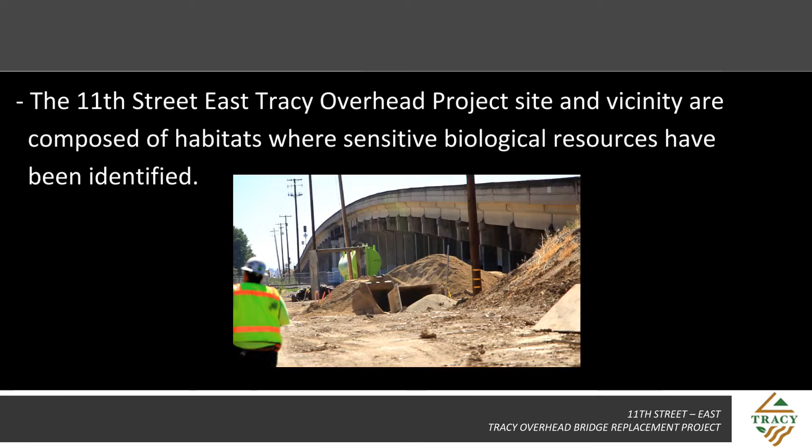Survey of environment: the 11th Street East Tracy Overhead Project site and vicinity are composed of habitats where sensitive biological resources have been identified. Located in the Central Valley, Tracy has a Mediterranean climate, sitting between infertile and fertile lands. There has been increased development pressure as the San Francisco Bay Area's population growth increases vigorously. Tracy currently stands as only the second city to uphold state standards of environmental maintenance.

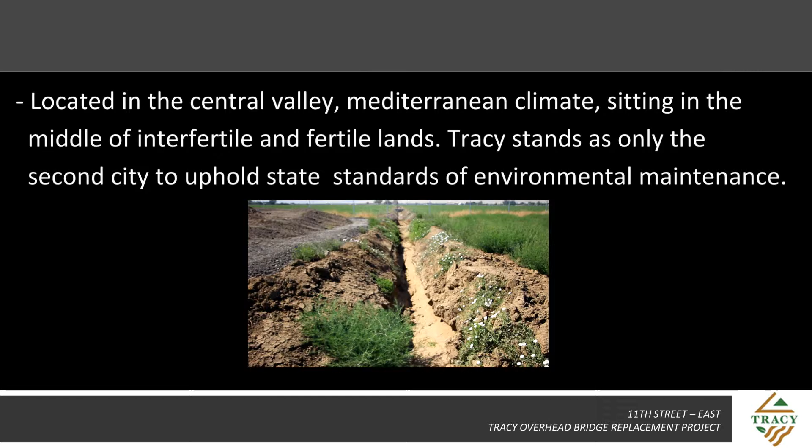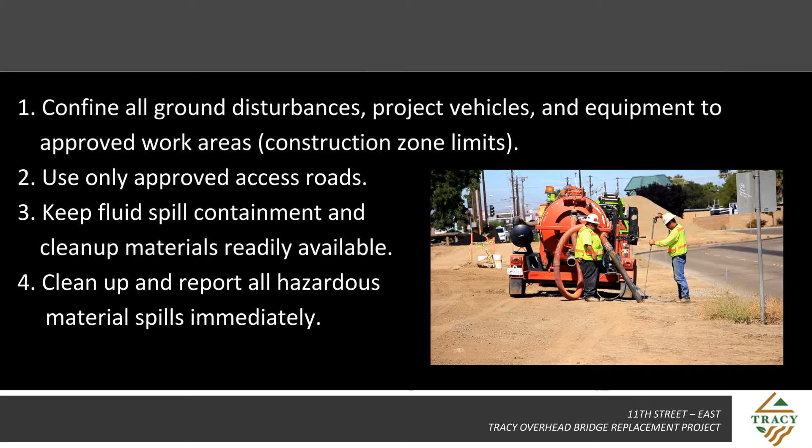GWPs must all be followed while working on the East Tracy 11th Street Bridge Replacement Project. 1. Confine all ground disturbances, project vehicles, and equipment to approved work areas. 2. Use only approved access roads.

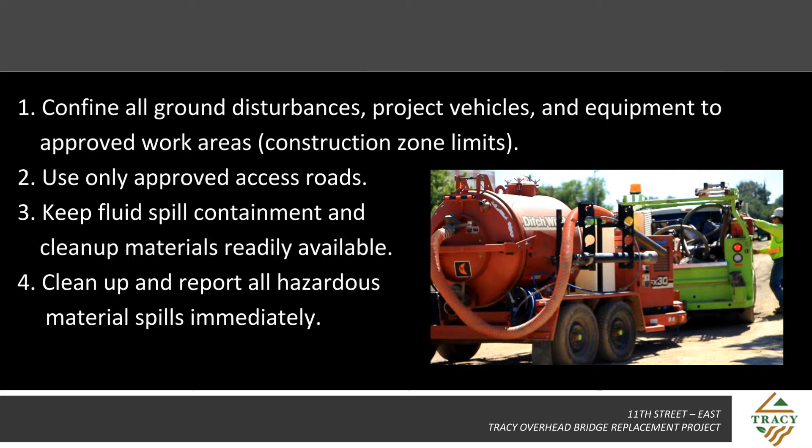3. Keep fluid spill containment and cleanup materials readily available. 4. Clean up and report all hazardous materials spills immediately. 5. Do not litter. 6. Do not bring pets, firearms, hunting, or fires onto the project site; they are prohibited. 7. Do not discharge water into unapproved areas.

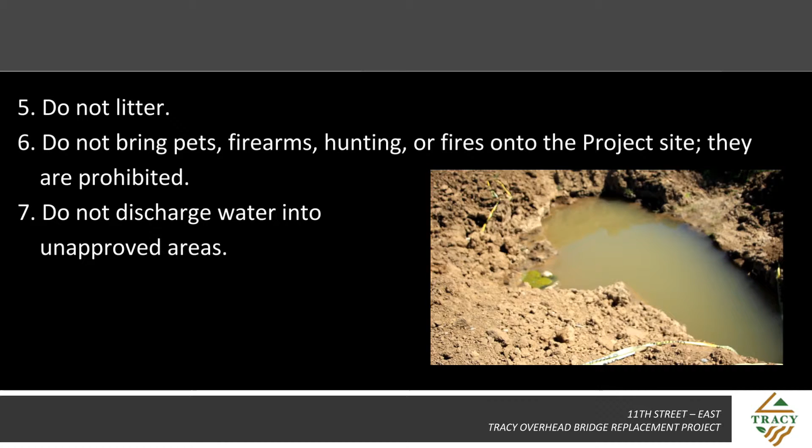8. Do not feed or harass wildlife. 9. Observe speed limits on dirt access roads of 25 miles per hour or less. 10. Implement and maintain erosion control best management practices.

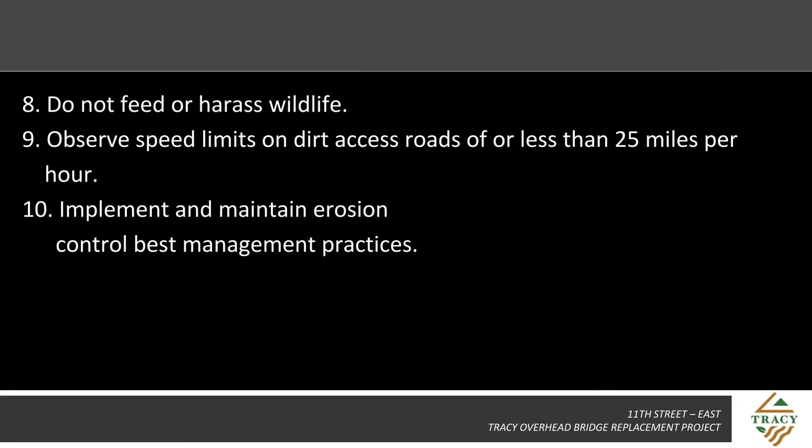It is also very important to check equipment for wildlife who may shelter in the warm equipment overnight. At the end of the day, pick up any trash that may attract wildlife.

Fire prevention should be obeyed, especially during the heat of summer or near grasslands. Smoking should be limited to designated smoking areas. Cigarette butts and cigars should be disposed of appropriately and not left on the ground or buried.

Provide fire extinguishers near all welding, soldering, or other sources of ignition, and keep fire extinguishers easy to see and reach in case of an emergency. Be sure to also follow any fire prevention laws regulated by the Union Pacific Railroad Company.

Environmental impacts and mitigation measures. In order to minimize construction impacts, the following should be observed.

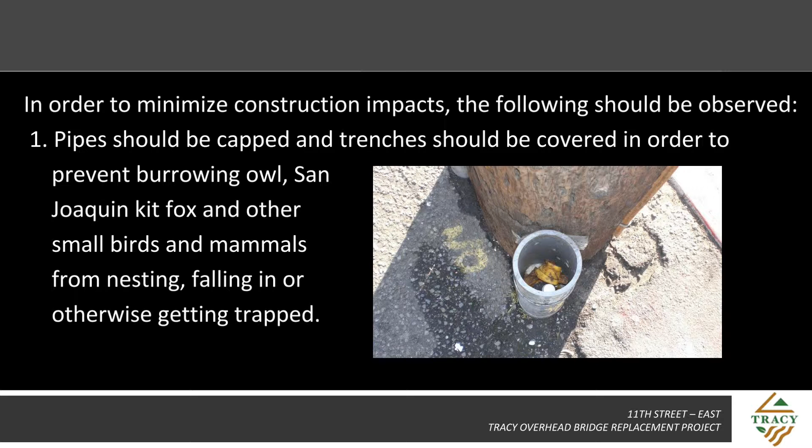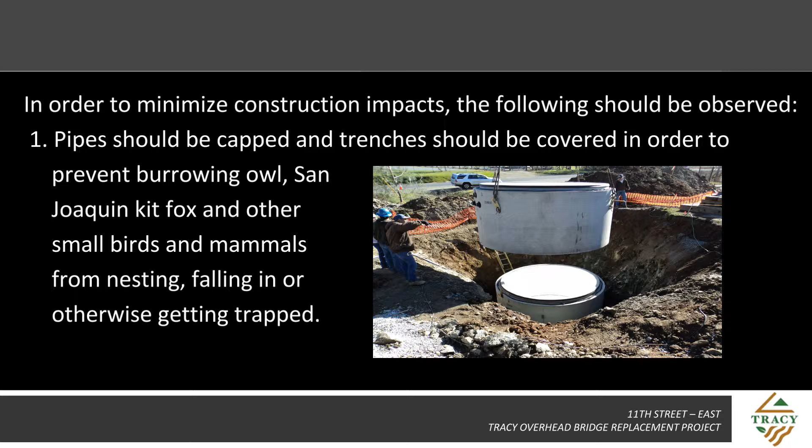1. Pipes should be capped and trenches should be covered in order to prevent burrowing owls, San Joaquin kit foxes, and other small birds and mammals from nesting, falling in, or otherwise getting trapped. 2. During active construction, open trenches need escape ramps so burrowing owls, kit foxes, and mammals won't get trapped.

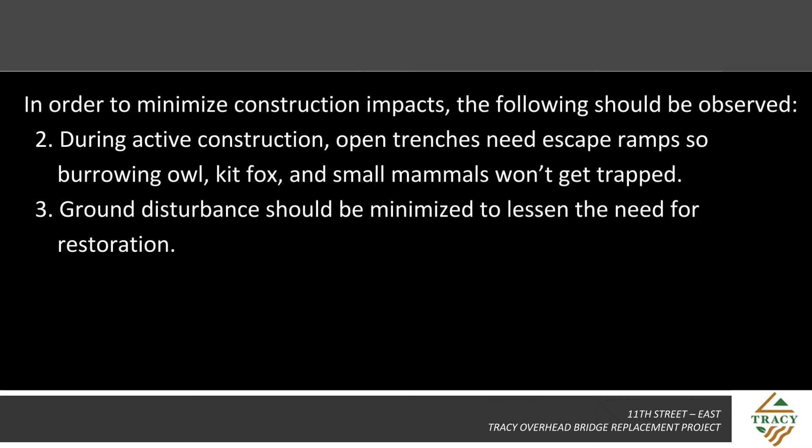3. Ground disturbances should be minimized to lessen the need for restoration. 4. Avoid possible disturbance of nesting birds by staying at least 50 feet away. Let the biological monitor clear the area before you begin work.

5. Stormwater runoff must not contain hazardous waste or debris that could affect the biological resources. Please report any wildlife found in the work area.

The following are sighted wildlife of the work environment.

The Swainson's hawk. Swainson's hawk nests are generally found in scattered trees or along riparian systems adjacent to agricultural fields or pastures, but the species is also known to nest in tall shrubs and trees in proximity to development near foraging habitat. There are two color variations: light morph and dark morph.

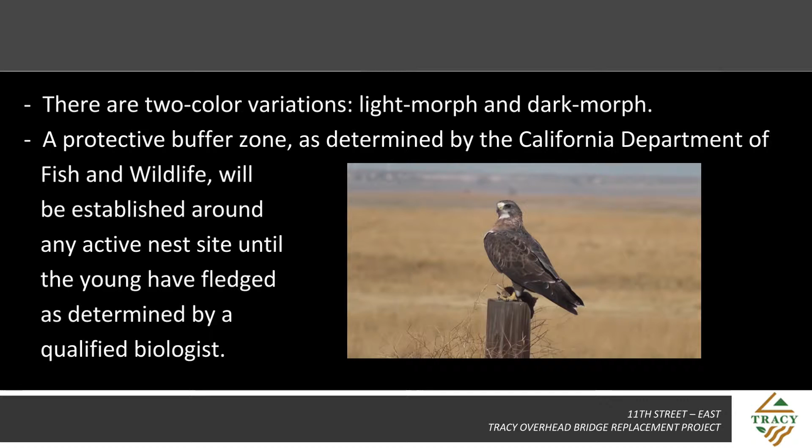A protective buffer zone, as determined by the California Department of Fish and Wildlife, will be established around any active nest site until the young have fledged, as determined by the qualified biologist. No construction will be allowed in the buffer zone. On the site, you may see the hawk foraging over the agricultural fields around the site.

The western burrowing owl. The owl is not a shy bird and may be found nesting on the railroad tracks by the agricultural fields. Burrowing owls nest in ground burrows, often occupying old ground squirrel burrows and badger dens. They are known to use artificial burrows such as abandoned pipes and culverts.

They are commonly perched on fence posts or on top of mounds outside their burrow. The owls forage in adjacent grasslands and agricultural fields.

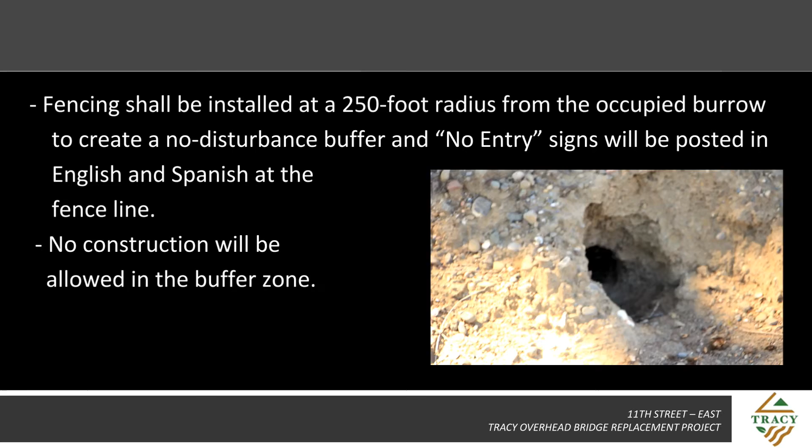If an active burrowing owl burrow is within 500 feet of the project disturbance area, then a no-disturbance buffer will be established. Fencing shall be installed at a 250-foot radius from the occupied burrow to create a no-disturbance buffer, and no-entry signs will be posted in English and Spanish at the fence line. No construction will be allowed in the buffer zone.

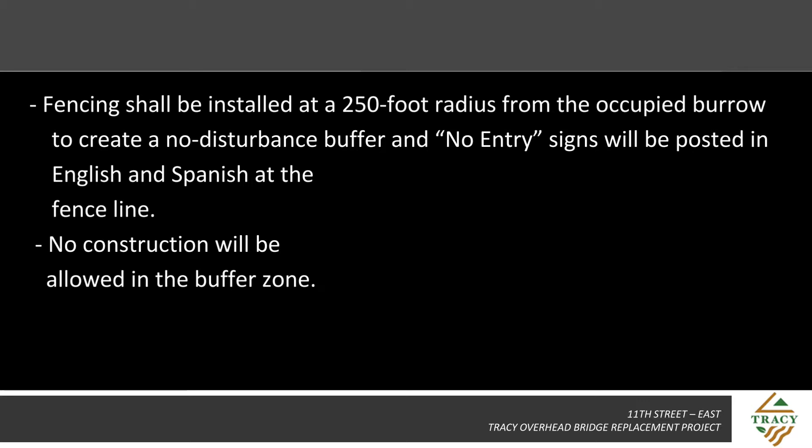The American badger is generally nocturnal. However, in remote areas with no human encroachment, they are routinely observed foraging during the day.

They prefer grasslands and open areas, which can include parklands, farms, treeless areas with friable soil, and a supply of rodent prey. Dens are typically larger than ground squirrel and other animal burrows, ranging from about 4 to 10 feet in depth and 4 to 6 feet in width.

After verification that a potential den is unoccupied, it will be excavated and backfilled by hand to ensure no badgers are trapped.

The San Joaquin kit fox may be attracted to trash on site. There are heavy fines if one is injured on the work site.

Generally nocturnal, however, in remote areas with no human encroachment, they will venture out during the day. They are the size of a house cat, with big ears, a long bushy tail, and furry toes, difficult to spot with their buff, tan, or yellowish-gray fur.

Common habitats are sagebrush and saltbush. They can be found in urban and agricultural areas as well. Dens are typically in large ground squirrel or other animal burrows.

After verification that a potential den is unoccupied, it will be excavated and backfilled by hand to ensure the kit foxes are not trapped.